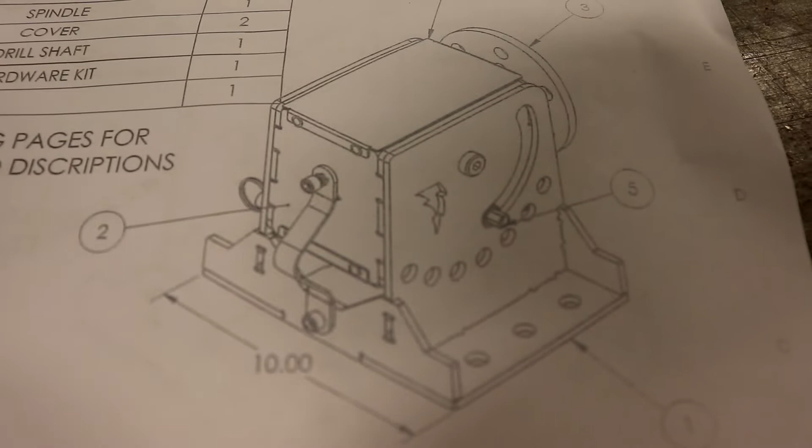Okay guys, the audio was terrible with the noise in the background, so I'm going to try and overdub this. So this is the Weld Tables Fab Turn welding positioner. It's powered by a drill right there in that connector. You basically put your drill on it, start your drill, and it spins it. The gear reduction is 40-to-1. And this is the gear set right here.

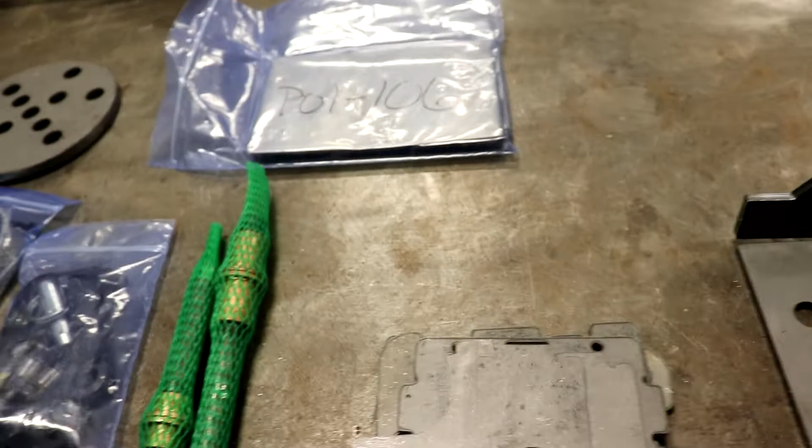It's pretty heavy duty, and that was the main reason why I wanted to purchase it, because I wanted to see how they were doing it. I built one a while ago and I used a chain and sprocket. It was not near as heavy duty as that, but it seemed to work just fine. I'm not crazy about the drill, but I figured I can adapt the motor I used on my other positioner to it, and I'd have better control. The hardest thing is to get it to the right speed you need. Plus, you need to be able to start and stop it.

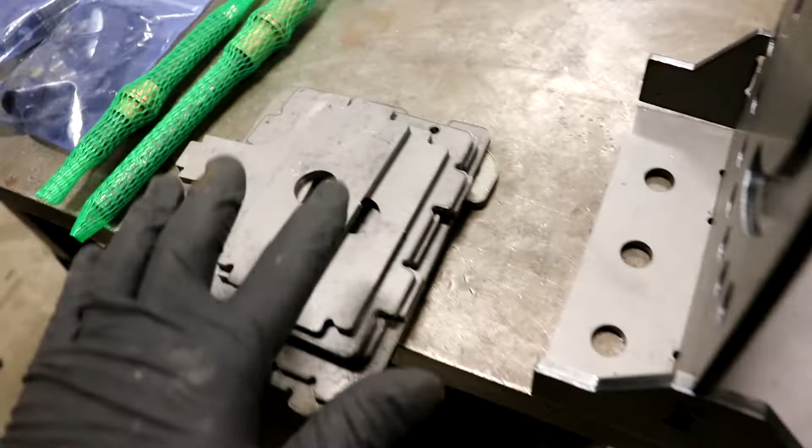Now, the whole frame here is laser cut out of cold rolled steel. That's the gearbox there. There's covers. The pieces that I have assembled are the frame. There's your drive shafts and bearings, and then of course the gear set and grounding strap. This stuff is cut pretty decent. I actually have a local laser cutter that gives me a better surface cut. This is not bad, but I've seen better.

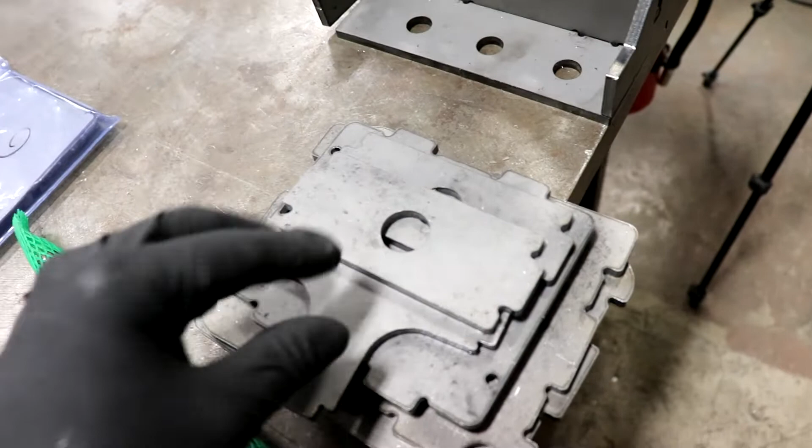Some of my concerns were the holes, which in the end had some issues with the pin sliding in right, but I altered that. What I'm talking about here is the surface finish. This is cold rolled steel, which is pretty nice, but they don't clean up any of this material after they laser cut it, so you still have some burrs on it. So I'm going to throw it in the tumbler and clean it up, because I like a nice smooth finish. Things tend to fit together a little bit better.

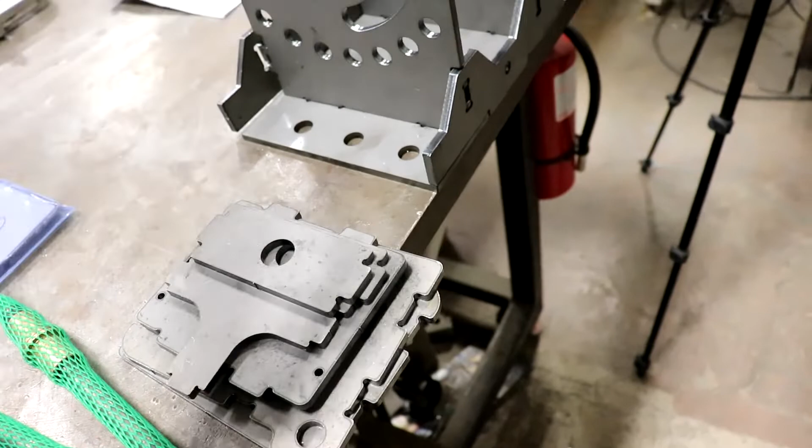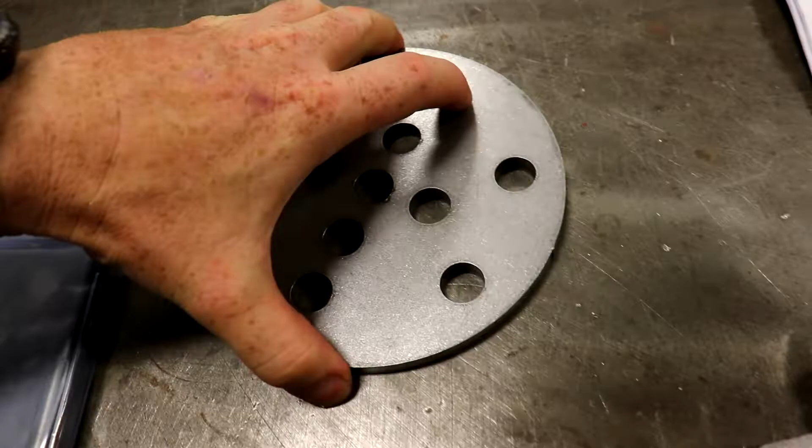And here we go. Here's the pieces that were taken out of the tumbler. I threw them in the tumbler for 20 minutes, just to give them an even finish and degrease them. Wasn't worried about removing too many burrs. There's a couple burrs left here from when it pierced this half-inch plate. You see a burr left there, but that I'd have to use a grinding disc on. But yeah, it looks a lot nicer, it's a lot cleaner, and it's ready to pop together.

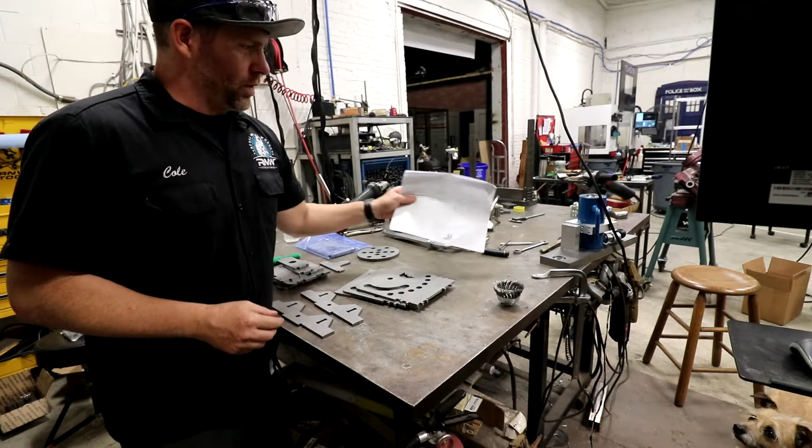All right, so according to these drawings right here, this is how we're going to put this together. Looks like you have two end plates and a base plate, and then you got your two side plates, and then you got your gearbox that goes inside. Looking at that, seeing how it goes together. Pretty straightforward.

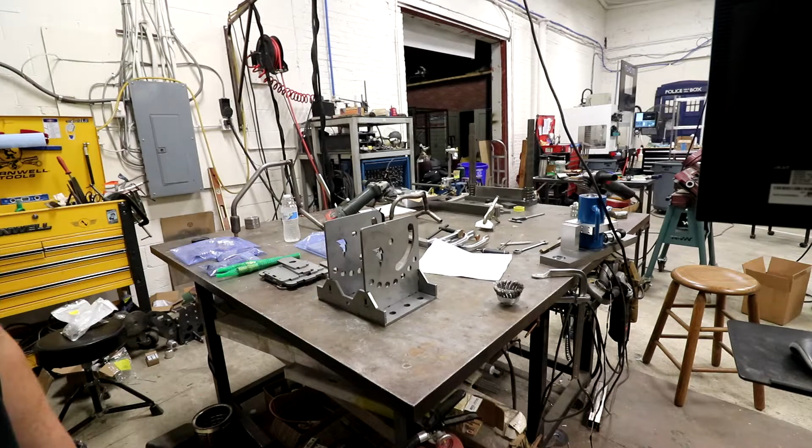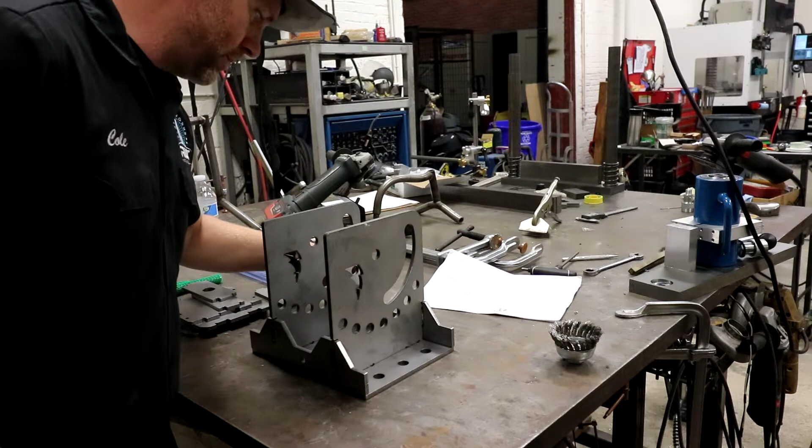There we go, there's the outside of the frame. Looks like you just need to weld here. But basically, you can probably just tack it for now. Make sure it's all square. Set it up with your 90-degree angles. Make sure you got it all square. Tack it. Make sure it's square again after you tack it. And continue putting it together.

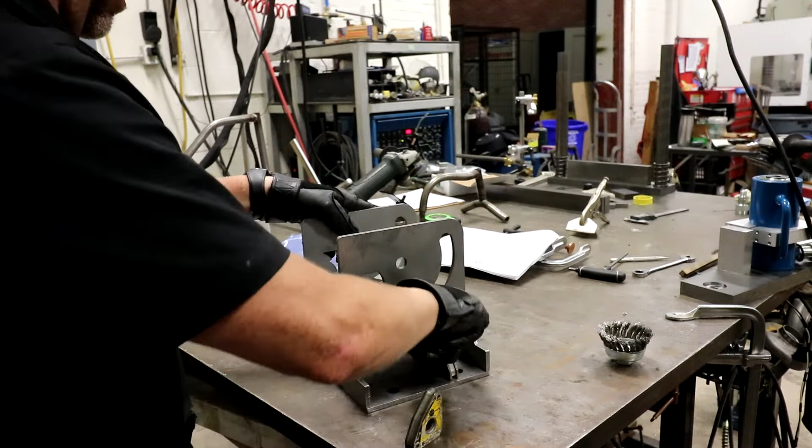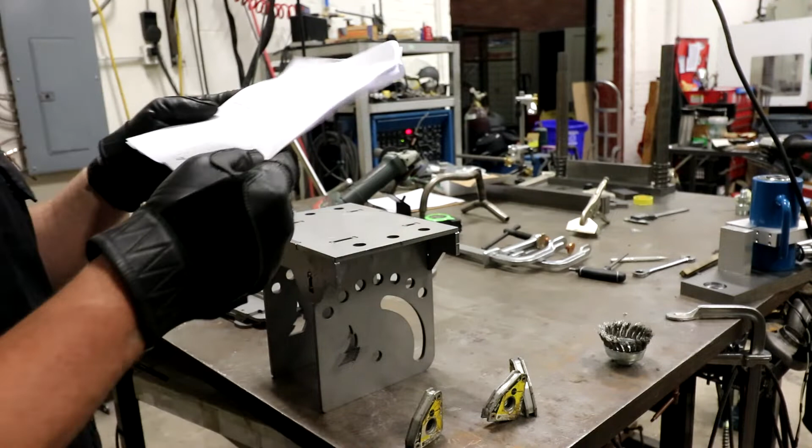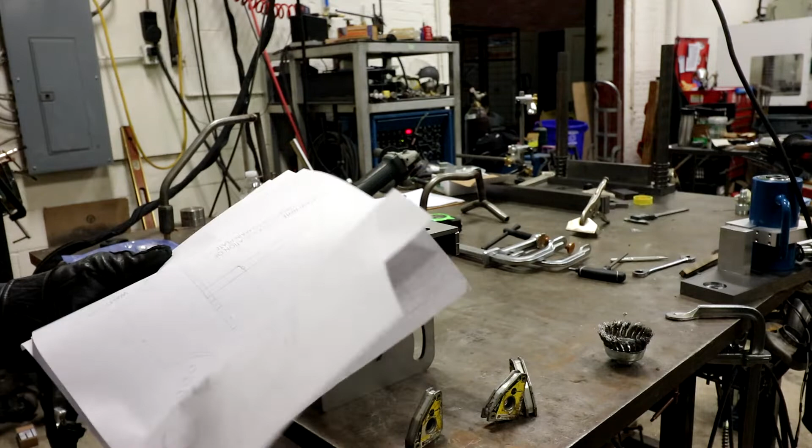Frame all tacked in. Haven't tacked the base in yet. Woo. Weld all tab locations. Just showing right there, there. Assuming they mean you need to weld in the bottom too. We're going to tack those in. I'm going to assume that needs to be tacked too, so we're just going to tack it. Tight.

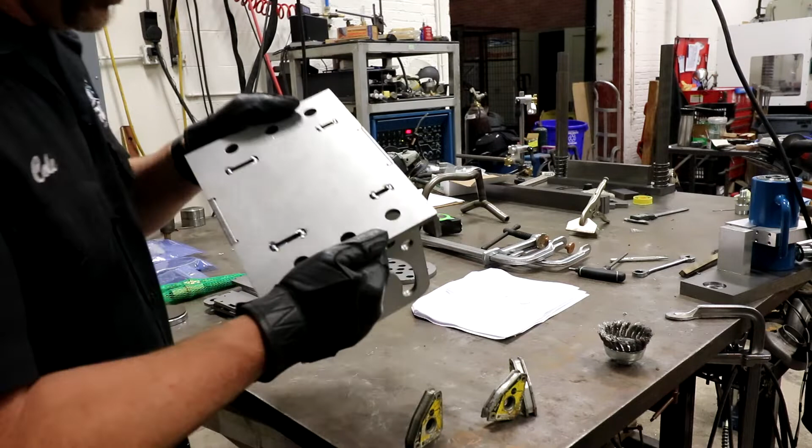Just a tack to put it together. You can see here, they're just quick tacks on the tabs. And then we'll go back and we'll put a little bit of weld fill in there after we verify everything's right.

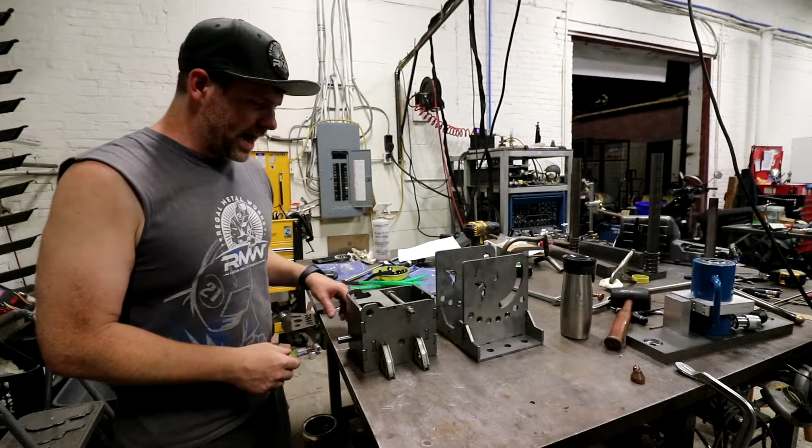Alrighty guys, we're back here working on this. A few days later, it is 90 degrees in the shop. We're in the middle of a heat wave. Oh, hey. And Dan is running the mill. Or running his mouth, one of the two.

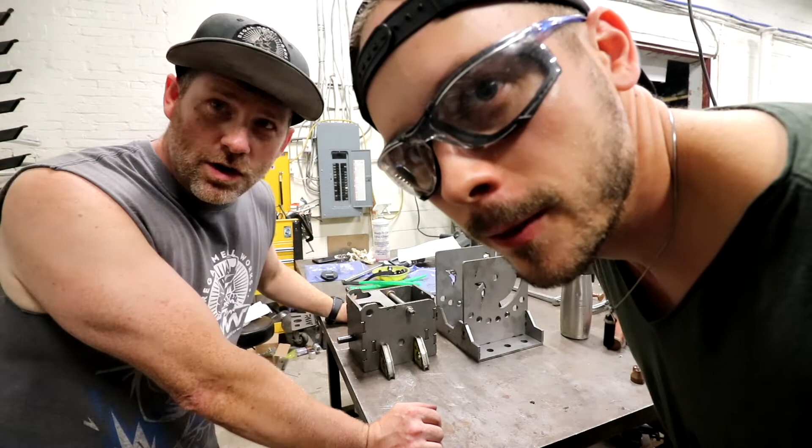I'm back, kind of. So in my haste, I welded up the frame because normally you think you weld up your frame first, but in actuality, you're supposed to weld up the gearbox first, and then assemble this around the gearbox, which is kind of bass-backwards thinking. And in my defense, which is inexcusable, there's nothing in the plans that state this. You actually have to go and search out. They have a YouTube video on their website, which unfortunately they didn't have when I initially ordered it because it was a pre-order. And I never really went back to look at it because why would you?

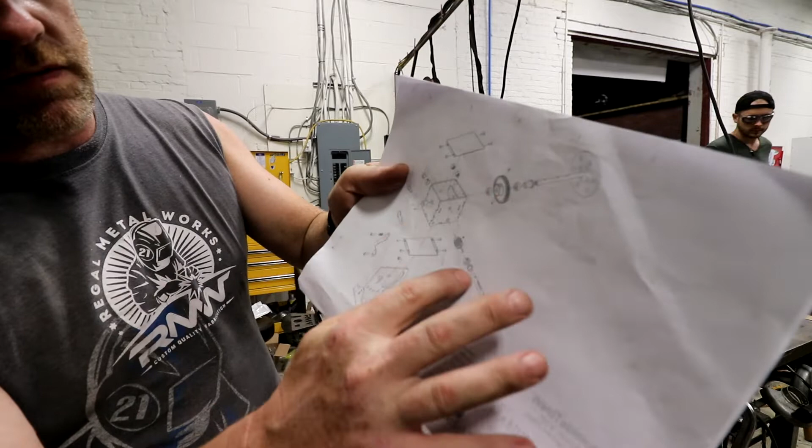And yeah, so now I'm having to assemble this gearbox, and they had it where you put everything basically in it, all the gears, all this stuff assembled in there, and then you build the frame around it, not kind of like what the graphic shows. Which makes it a lot easier because you have to get your hands in there and move some set screws and some pins and things like that, or not cotter pins, keyways. So I am going to weld this box up and not assemble the gears in it and put it together in the frame so I don't have to tear this frame apart. And hopefully I'll be able to get it together. So that's the plan.

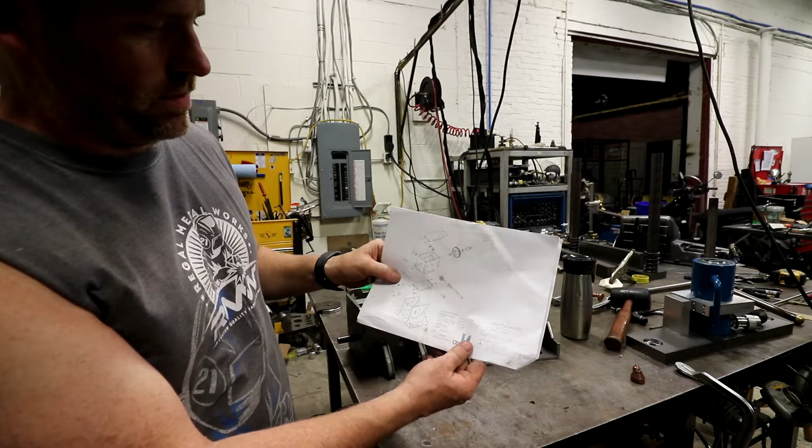You know what really grinds my gears? What, Dan? I don't know. This thing's not charging my phone. That grinds my gears real bad. Probably couldn't even hear me.

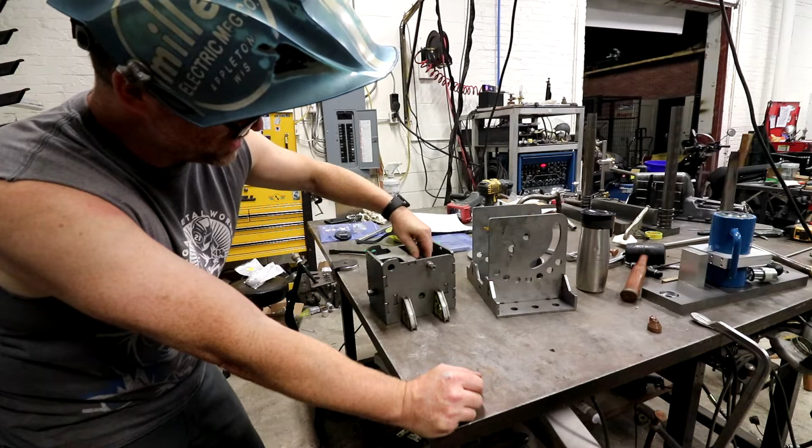So I'm just going to go ahead. They say to weld the inside, because this sits inside this frame and your welds would hit, and that would generally be true, but because I'm TIGging and I'm just tacking, I'm just going to tack there, and from these little tabs here, it pretty much recesses it in. So I'm just going to tack it, and then I'll probably just weld these seams here because they're flush. I could just fuse weld them and it'll be fine. I'm just going to go ahead and tack this and see if we can't keep it square.

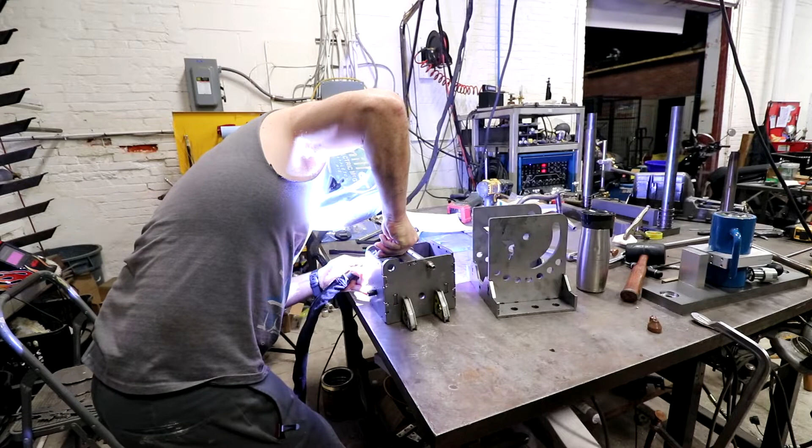Square, that turns, this guy turns, we're good. Now we can start to assemble it. So I'm going to go ahead and probably put a little fuse here on these ends. I don't know if you can see that. Bring it a little closer, I'm trying not to burn myself.

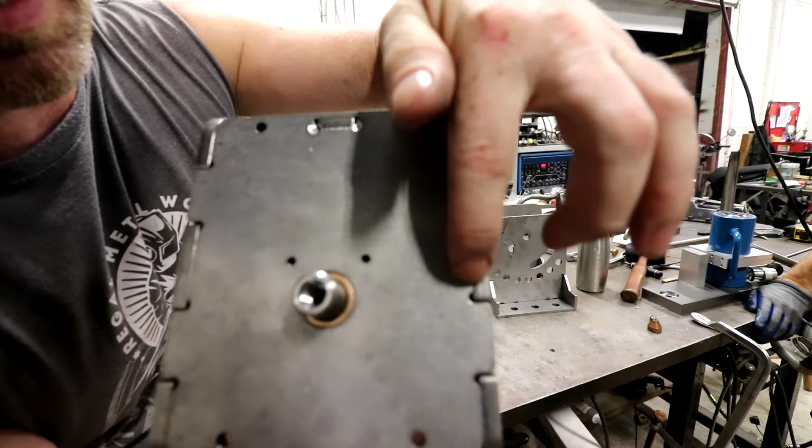But you could fuse these with TIG and you're not going to have any problem. Plus this is on the end. It's mostly for the sides here. These ones you don't tack in because they're supposed to free float, so you don't bind up your shaft. That gives it a little bit of play.

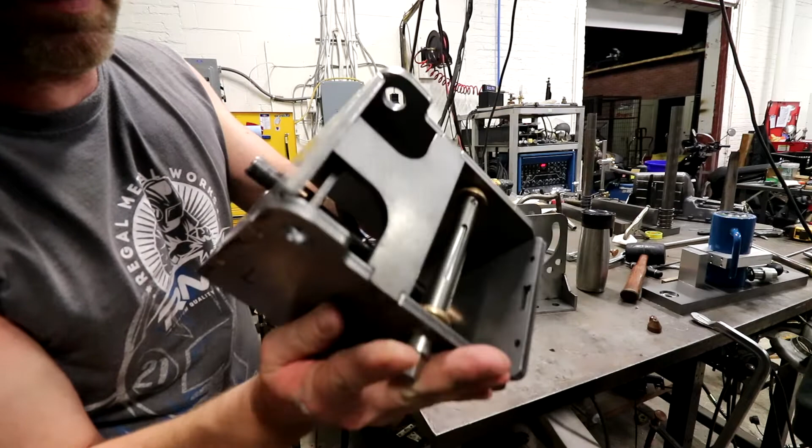But you can see I just tacked the corners here. And that would honestly probably be enough to hold this little thing. But we'll go ahead and we'll just fuse weld along the front sides. Fuse welds just to hold that in. Fuse weld the backside here.

That's that. That should be good enough to put together. We'll let it cool down a little bit. And then we'll do a dry fit into the frame, make sure that we can access everything. And hopefully we won't have to pull that apart because that's already all tacked up and squared and true. And I'd hate to have to tear that apart.

Alright, here we are. Another day. I'm just doing this while I find the time.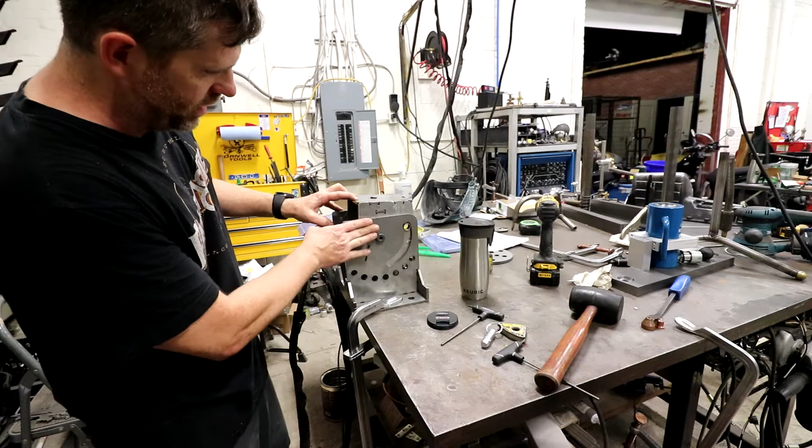So now the fun part is trying to assemble the gearbox while it's already installed in the frame. I was able to do it yesterday in a dry run, so I don't think it's really an issue. So if you inadvertently weld up your outside frame first, not a big deal.

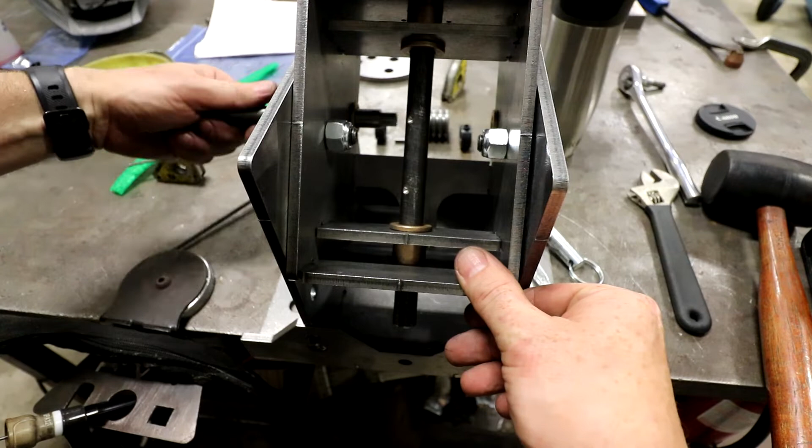Alright, we're going to install this drive shaft now that has the worm gear on it and the collars. So this is your drive shaft here. It's the one that has the Woodruff key slot. It has some set pins. Note where they're at. That indicates the way that everything goes together. So in other words, you're going to put this collar and set it in there, like that.

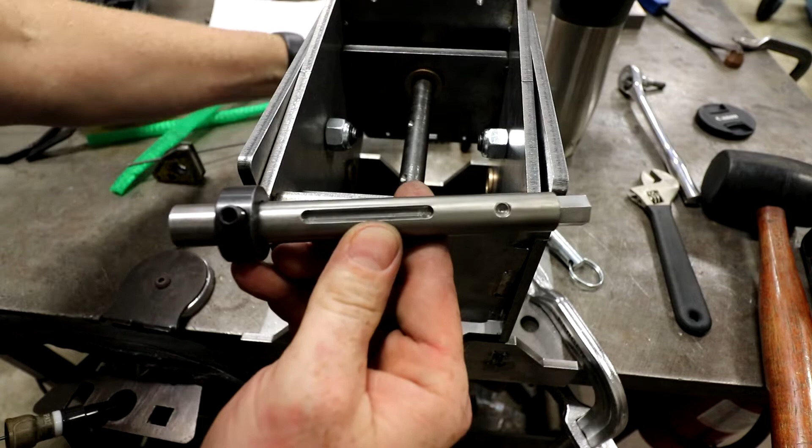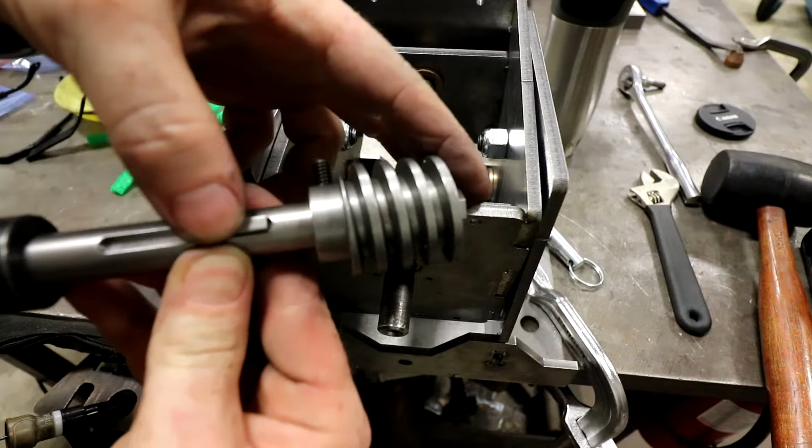You're going to slide your worm gear with the Woodruff key slot and the set screw to match up with that. You're going to want to put your Woodruff key in first before you do that. Slide it together, and that will lock into that little divot. You'll then put on your other collar, and you'll lock that into that divot. And that should be a perfect alignment.

So now you have to do this while this gearbox is mounted to the frame, if you built the frame first. If you didn't build the frame, you could do this with the gearbox outside, but it's a lot more difficult to do because the collar, these shafts, press into this. So we're gonna put this together here. You want to take your time and make sure you do it right, or you'll end up doing it multiple times. Trust me, ask me how I know.

So the first thing you want to do is slide this collar on. And you're going to want to put your Woodruff key into that slot. And it's not as long as the whole entire slot, which is nice, because you need that room to actually get your shaft on. Actually, I take that back.

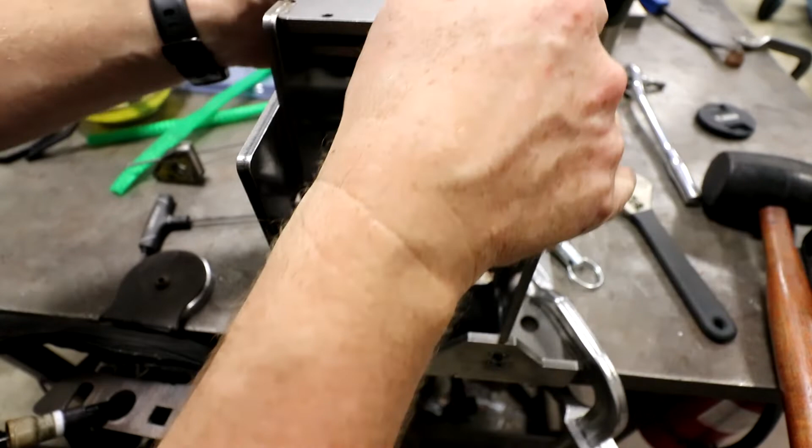And we're going to have to actually rotate this shaft so that I can get my Allen key on that, because it's sticking straight up instead of out to the sides. I'm just using a crescent wrench. Rotating that, and lining that up and setting that set screw. And I should lock that into hopefully perfect alignment.

And then we have this last set screw. We're also going to have to rotate it again so that I can get the wrench in there, or the Allen. There we go. Set itself, find the hole and center it. And there we go. Now you got the gearbox assembled there.

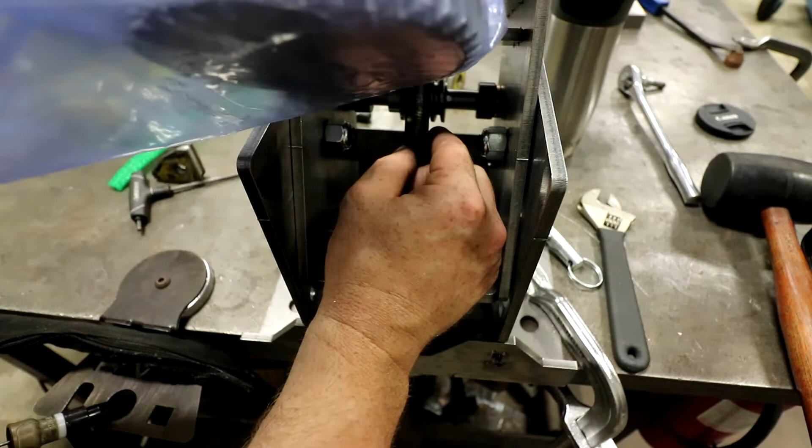So now we're going to have to do the main drive, or the driven gear, which is the big gear here. That's going to go on this shaft and see where the set screw goes on there. So hopefully we're not going to have too much of an issue there. Alright, now we're going to put in our main shaft. This is the shaft that your platen gets welded to, if you choose to do so.

If you plan to use some sort of vise clamping system, you could also install that at this time. They say in the video to weld it first, but honestly I don't think it really matters. Weld it after the fact. On the welding positioner I made, I actually used the positioner to rotate and weld it around after the point. But this is your shaft.

You got to make sure that the threaded side goes into the back side here, and that's the side that has the two big loops down below, because this is where your grounding strap goes. So this basically just slides in the front. You got to slide a collar on.

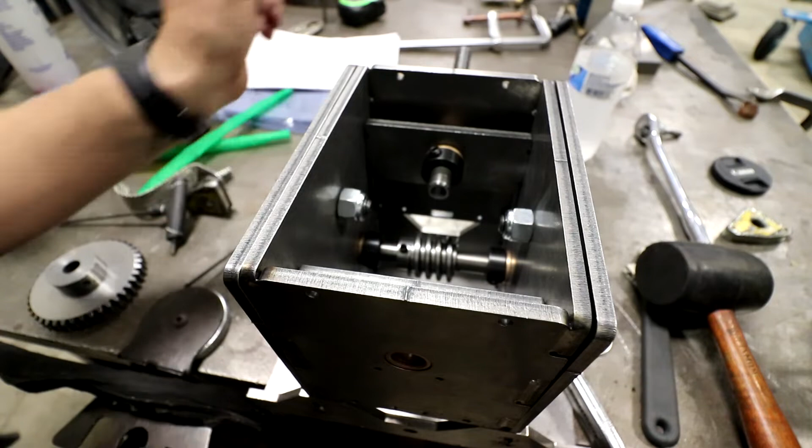Alright. You got to leave it back a little bit because now you got to put your main driven gear in. Okay, and it has two set screws here, one on each side. And it goes with this side in the front. Now, you can see the worm gear right in there. This has to drop straight down on top of that. If you try and slide it up in, it won't slide once the shaft's in. So you gotta actually line it up, drop it straight on top, like that, and then slide your shaft in.

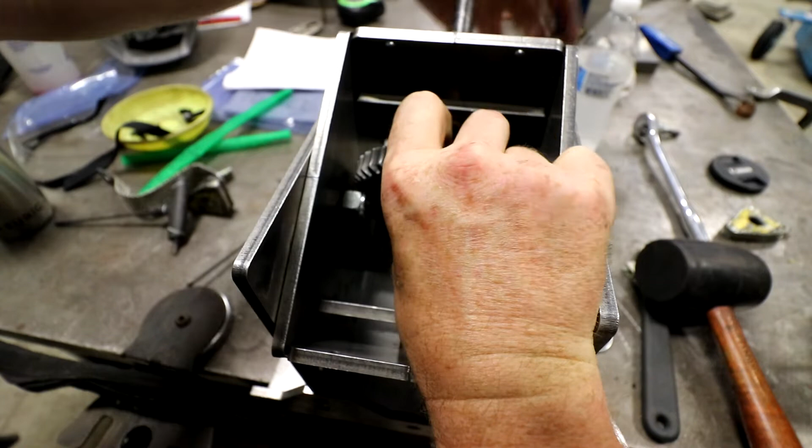Just like that. Slide that back on. Drop that straight onto the worm gear, and then you want to try and slide that shaft in. You want to try and keep that gear centered right above that worm gear. If you have the box already assembled, the frame, you'll see that it won't go too much further. You'll actually hit these nuts, the pivot nuts.

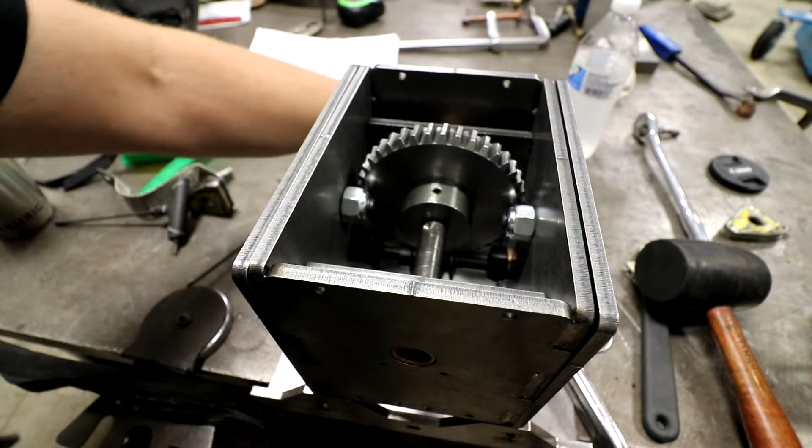So then you have one more collar you got to put on before you can push it all the way in. So make sure you put that on. And then slide her in. They also have divots and set screws on it.

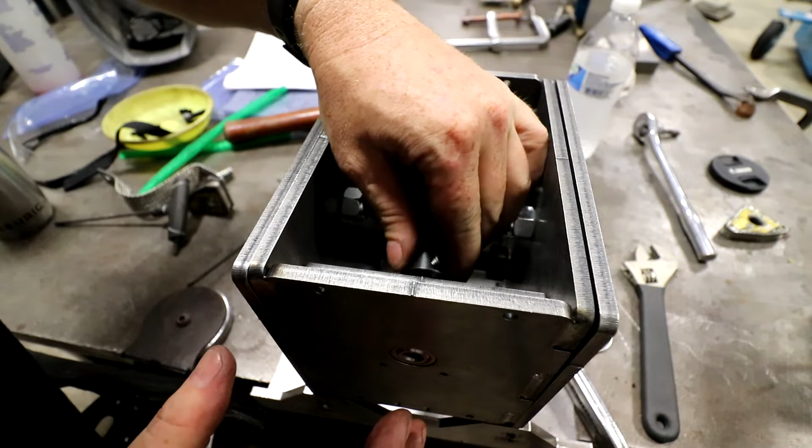Stuff's going to be a little tight the first time you assemble it, but that's okay. So you want to make sure that this is up. All these will be facing up, including this. They'll all be in a line, and that's where the set screw is, divots on both sides, and you gotta get one of them locked in first.

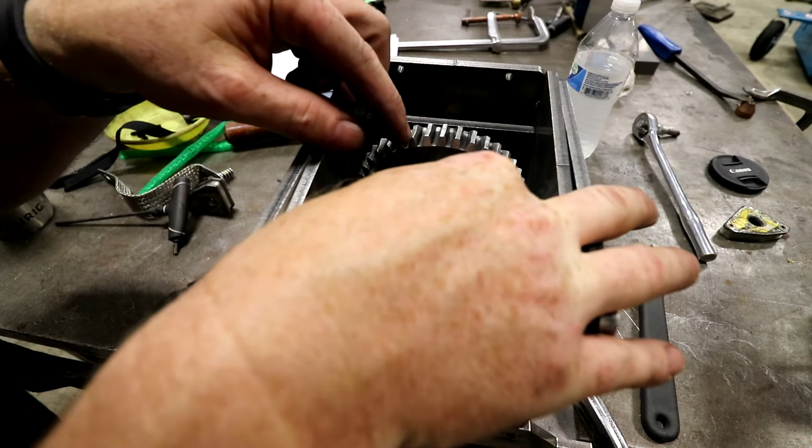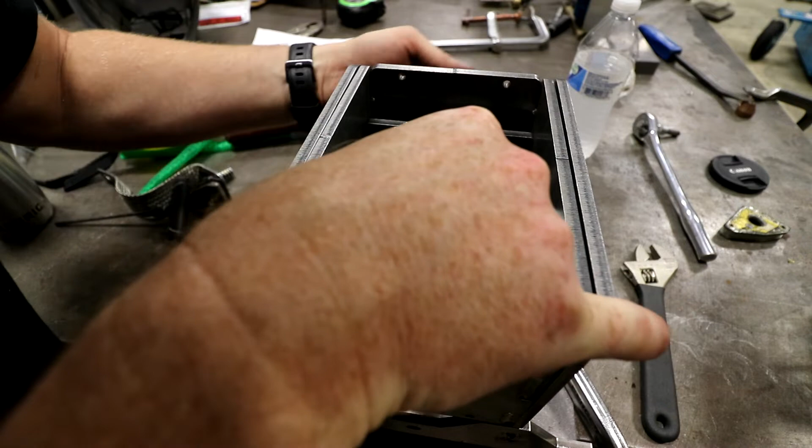It looks like I am off. So I'm gonna have to actually pull this back out and slide the shaft in so that these are all facing up. But you can see my divots are over there. That means my divot for this shaft is over there. So I'm gonna have to back it out and reposition the shaft. I can find the hole. There it is. There we go. Back in. And then you can tighten this first one down.

This first one here. Gotta make sure your divots are all pointing up because you can't see these divots and you have no way to really locate it. But it's facing straight up, so there's 3. So you can see this one. So once you lock that one in, you can rotate that straight up.

This is what I was saying, when you slide this gear in, you have to make sure this is pointing straight up or you'll miss your divot altogether. And then we're going to have some issues. It'll kind of pull itself in, straighten out, center, which it did there. You can see this last one, this one's also facing up. Let's stick it up so it doesn't slide back down. Get that snug down in. Okay, so they're all snug now, just double check.

Now we gotta get the one on the other side. So we gotta rotate this thing. So this is when you would take your drill, put it on there and go slow to make sure that the gears mesh correctly. Because if they're not meshed correctly, if you don't line it up right, it'll bind up on you.

But if you try and actually turn this before you have your set screws set, like, oh, I want to set them both, or do this bottom one before you do this, it won't spin. The gear will spin, but your shaft won't spin. You'll never be able to line it up. Same as when you take it out. You gotta loosen the top one first, loosen all these, and then go to this one and then loosen this one, and then you'll be able to take it all back apart.

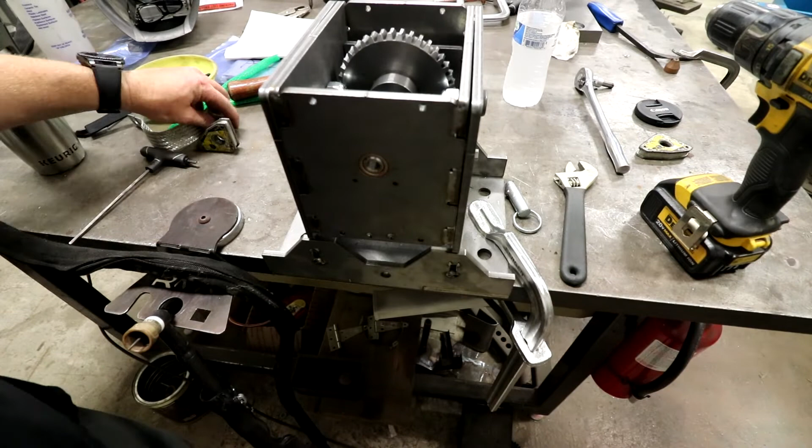All we have left is the grounding strap. Move you back a little bit. And that's pretty easy. That just basically is a spring and one of these locking Allens. You just basically put some tension on it. That's what you're going to do. And then it has another Allen here. Basically do the same thing here. There's no spring on this one. You tighten this one down. This will allow it to pivot all the way up.

You'll have the grounding strap on the straight shaft. It's actually pretty smart how they did that, because once this locks in with the Loctite that's on it, it'll never spin and the spring will just rotate and will keep this thing from binding up like that. So that's pretty much it.

All you have to do is weld your top on, your platen, or in my case I have a vise and another platen with threads on. So I might weld on a nut so that I can change my platens and things around. That's what I did on mine. But the reason I bought this was to see if I can. I don't like the idea of using a drill. I mean, that's great and economical, but that's really hard to start and stop.

You know, stopping's not as crucial as starting. Sometimes you have to heat the piece up, get the puddle flowing, and then you start it. Well, you're not going to be able to do that with a drill. You're going to have to actually get it going and then try and backtrack. But I like the idea of hooking the motor up to this and using the potentiometer control like I did on my other unit.

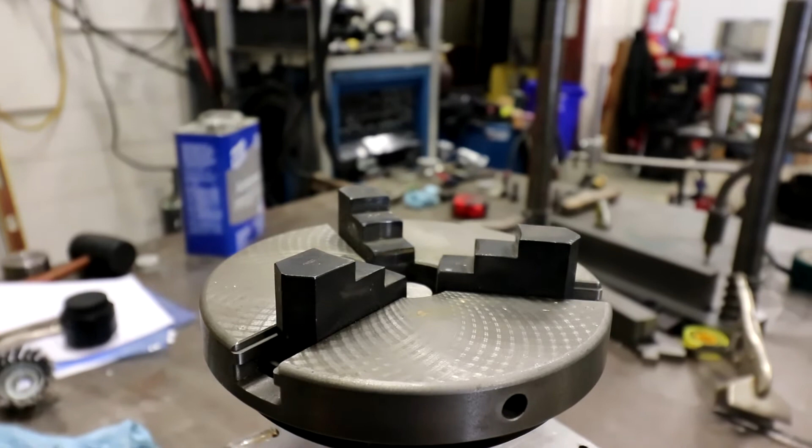And there is the problem with using a drill. There's just no way to fine tweak this. I mean, that is too fast already for some TIG welding. And it'll just stop on its own. There's no way to really adjust this.

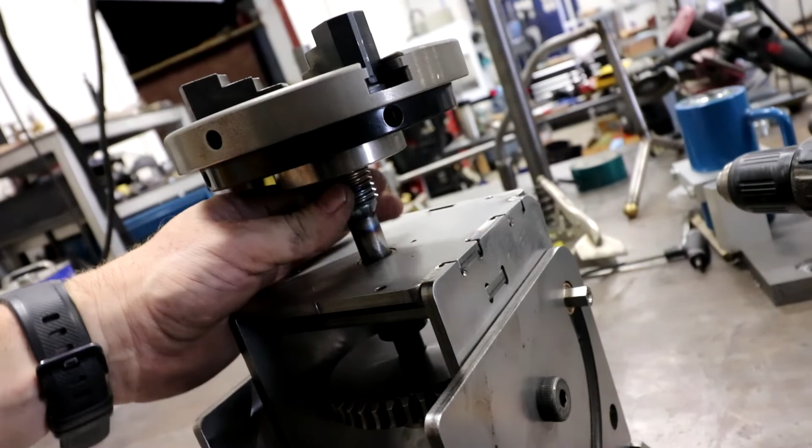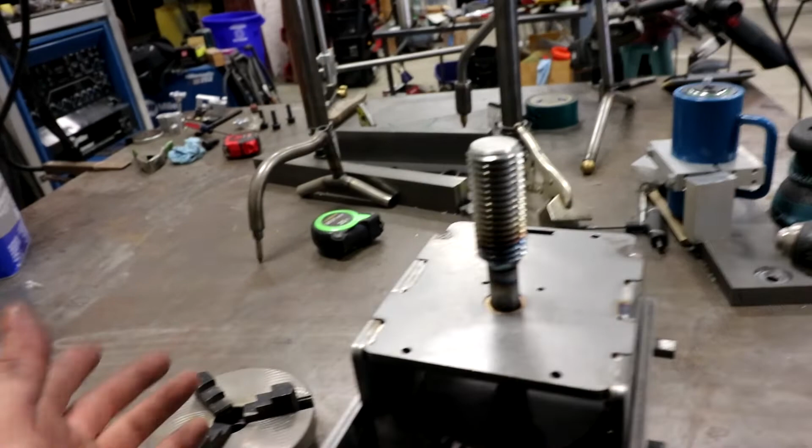So, but that's not why I bought this. I bought this so that I could put a motor on it and spin it properly, just to see how these guys were doing it. But I went ahead and retrofitted, welded on a 1" by 8 thread per inch. Let's spin this off here. 3-jaw chuck that's available from, I think it's Grizzly's where I got that. It's a wood lathe chuck, so it's much smaller. And if you're just doing thin tubing, you don't need anything beefy. You really don't need to get an expensive metal lathe chuck.

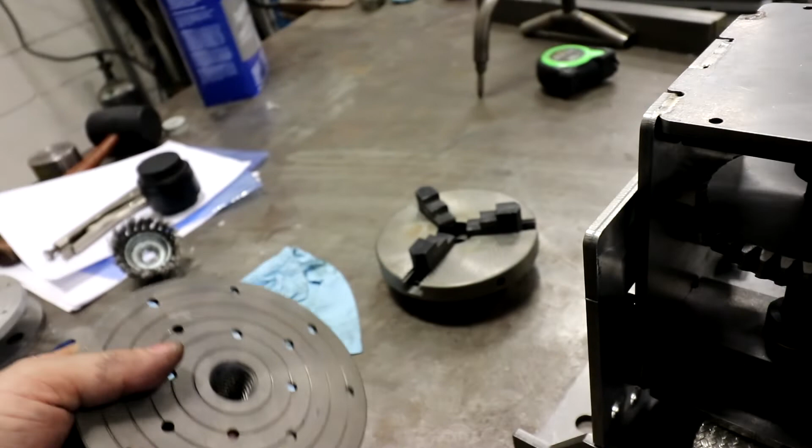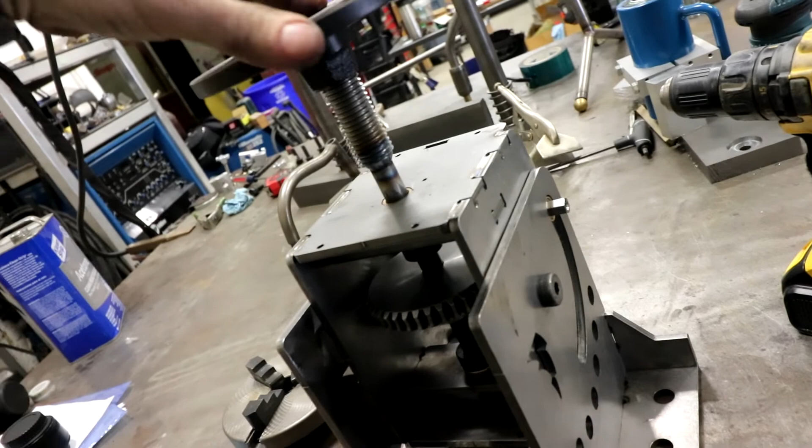But they also sell these platens. They're very cheap. I can't remember what this thing was, but it was cheap. I think these were $15. They have one in aluminum and they have one in like cast steel. And you just thread these right on. No problem. I need to put a nut on here so we can lock it down. If you want a platen, they sent this 1 inch that you're supposed to weld on and then you can clamp on their stuff.

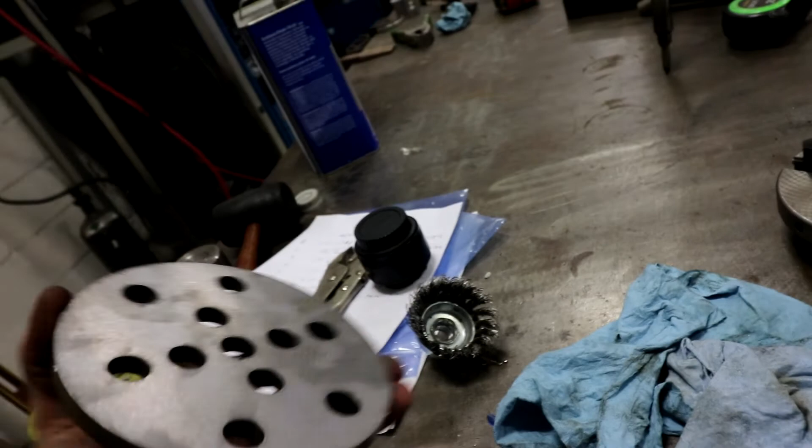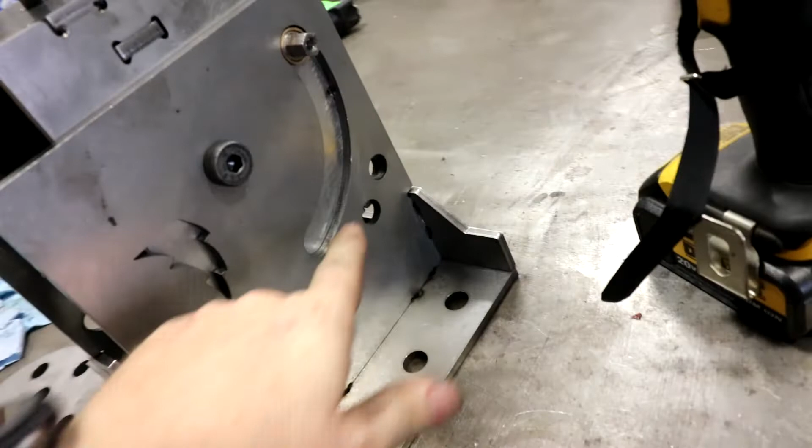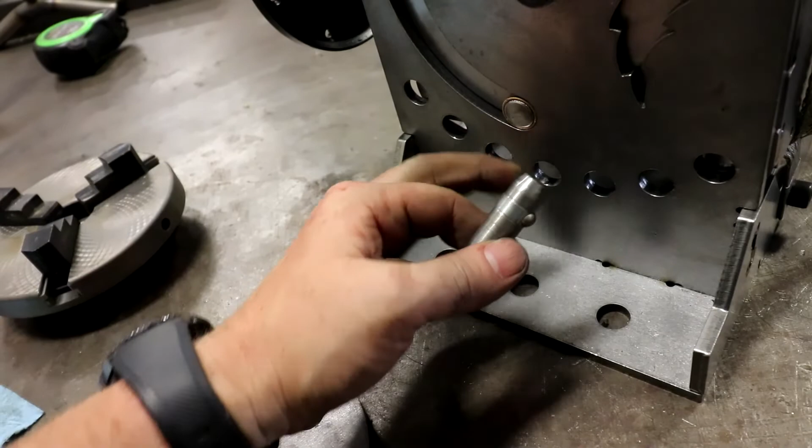But honestly, I had some issues and you can see there's some taper on these holes. The pin wouldn't go in at all. I actually had to machine this down. The pin wouldn't actually go into the holes because there was too much burr. I tried to deburr it and it just wasn't fitting. So I don't know if their tables are the same way, but that's kind of disappointing.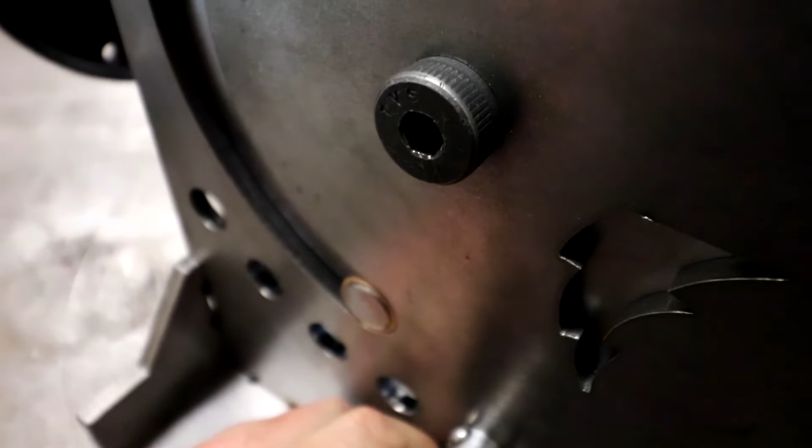Now this is 1/4 inch plate, this is 1/2 inch plate. And I can actually see that taper in there. And there's no way this would fit down in there and push through. Well, maybe it will. But definitely not on these. Yep, that one went through. And maybe they have these just slightly smaller, or maybe it's just the burr from when they kicked in and kicked out. But you can see it just doesn't want to go in. There we go. To push the bolt in a little bit, but that's way too tight.

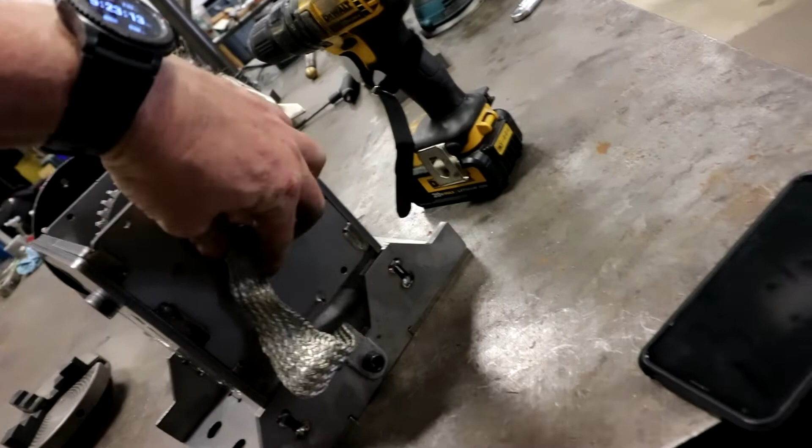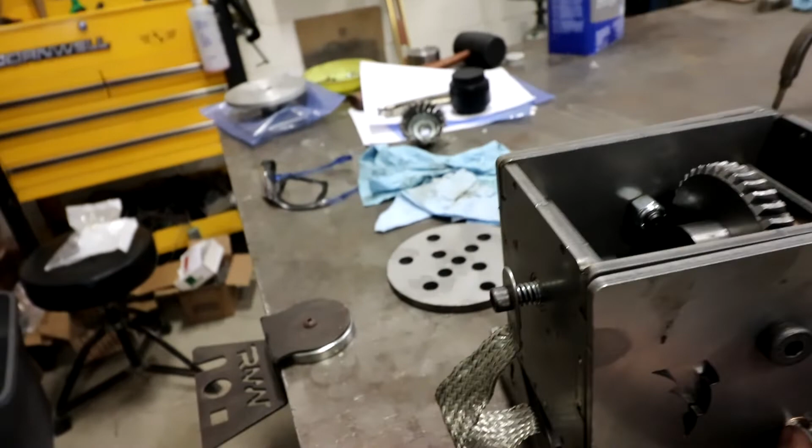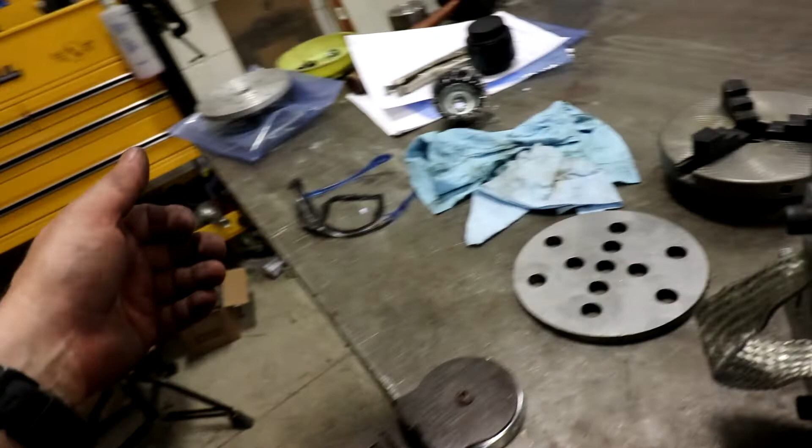So, but overall, it's a pretty nice little unit for what it is, for the price. Definitely going to take some tweaking. This thing keeps wanting to spin, so I'm not crazy about that. This grounding strap. Let's see if it catches a little bit. It wants to spin with it. But I'm going to mount a motor to this at some point. I have 2 motors down here and a controller for them. That's a mess down there. That's my unit that I built that's small that uses the same setup as these guys, and that I can actually adjust down to real slow.

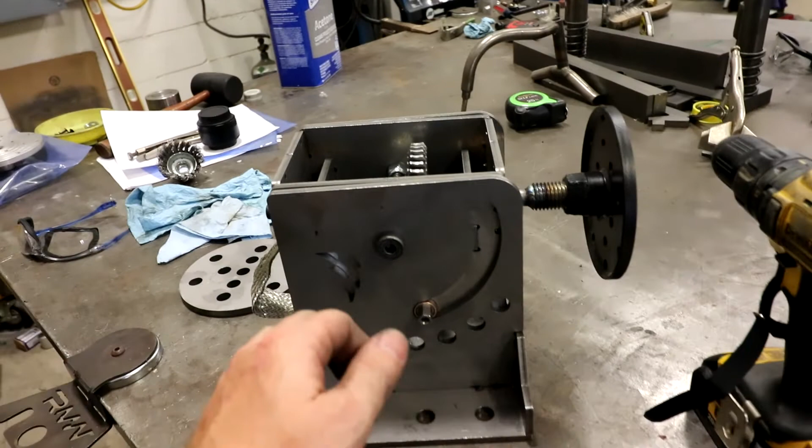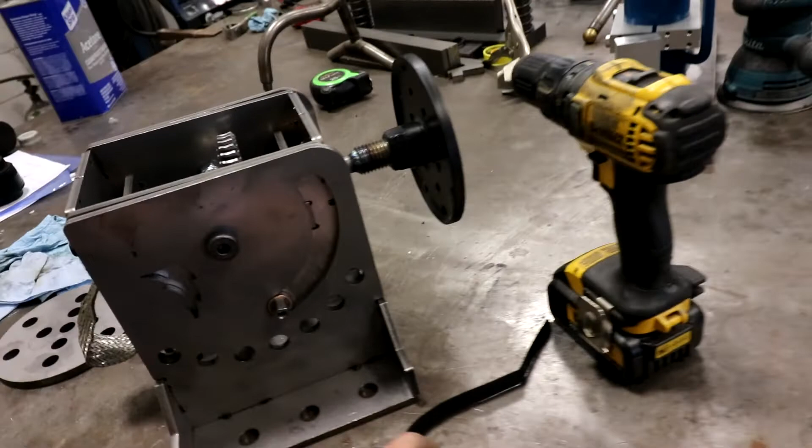But I wanted to see how they were doing this and how they were doing their gearing, because I'm using a chain and sprocket and not gears. But I have a bigger motor. I might retrofit up to here and just see how she works, because you'll definitely be able to control that. This is terrible. This is not a good idea at all. A hose clamp with a screwdriver adjusting would probably be better, but the problem, at least with these DeWalts, is they're not stable down low. And you just can't get it to go much slower than that, and it's just not quite slow enough for TIG welding.

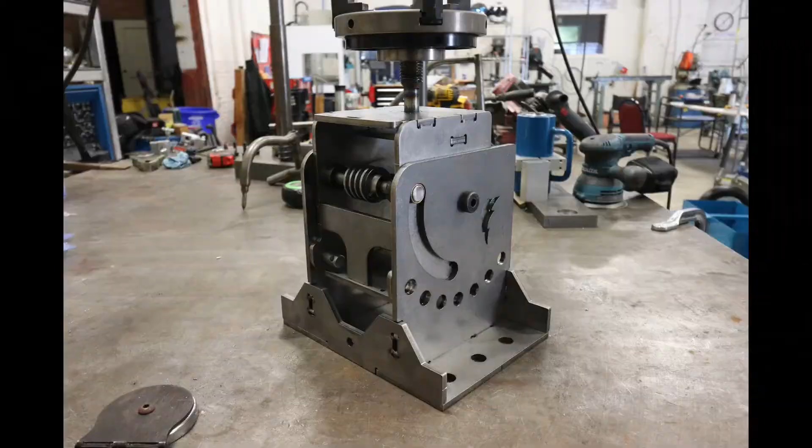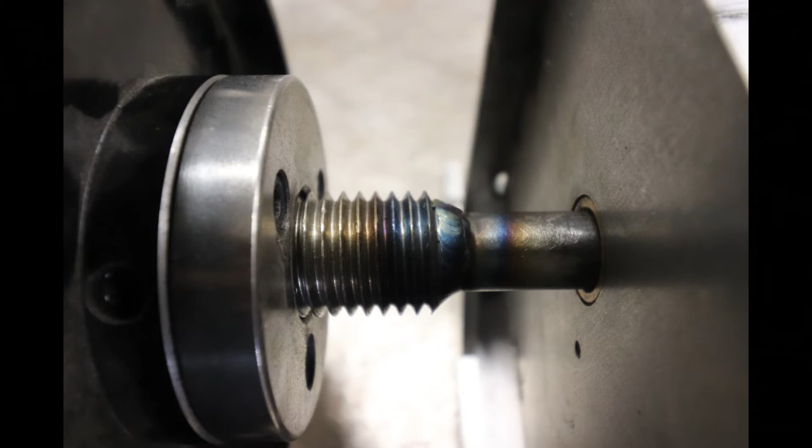Alrighty guys, I know I came off sounding a little negative there in that last clip, but this actually is a really nice little welder. The drill thing doesn't quite work for me. Maybe it'll work for you, work for MIG welding. TIG welding, smaller stuff that you gotta get some heat into is going to be a problem. But hey, it's a nice unit and the price is right, and you guys can check it out.